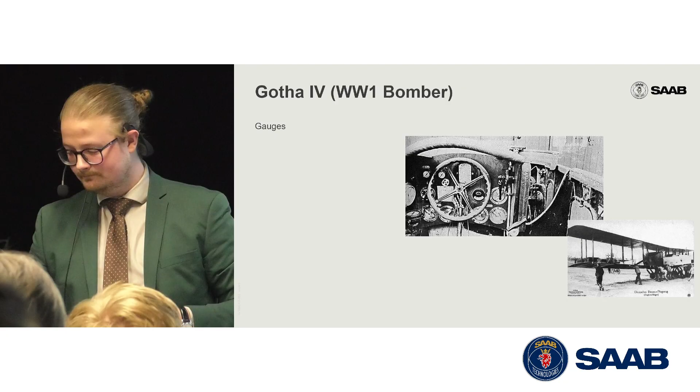What happened with the sound?

We also start to see a major improvement of the cockpit. The cockpit is now fully enclosed by a canopy. And there have also been some first early human factor designs, the Basic T. The Basic T was a British human factor invention, and the new arrangement allowed the pilot to easily scan all the vital information in a T pattern.

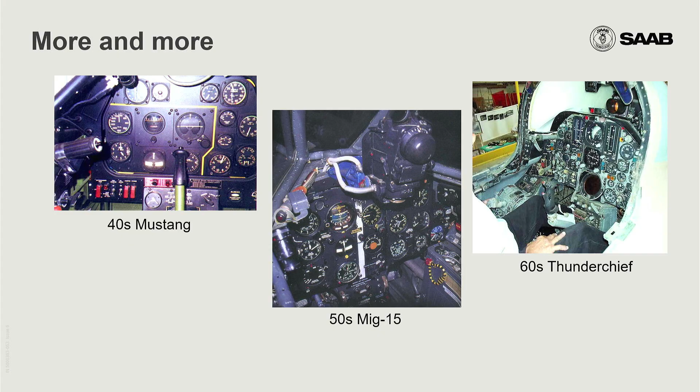Aircraft development after the war grew rapidly, and a lot of information was needed. And the more information needed, the more instruments were needed as well. As we can see here, the more capable the aircraft became, the more information had to be displayed and presented for the pilot. From the 40s Mustang to the 50s MiG-15, and I took an example of the 60s Thunderchief here with even some radar displays available.

More and more instrumentation. Three examples of very capable aircraft, but the human factor design, I'd say poor pilot: a lot of information, workload, overload. One instrument for each situation, one instrument for each capability.

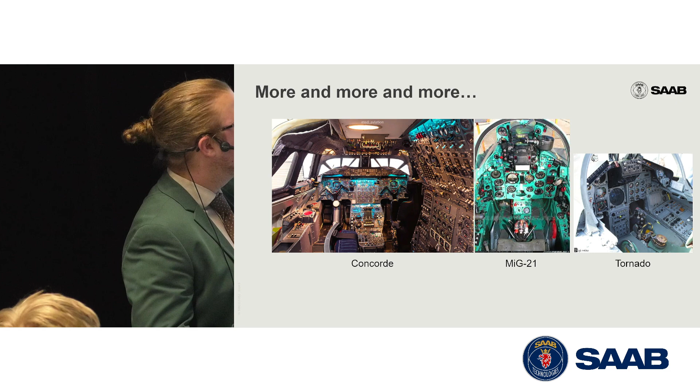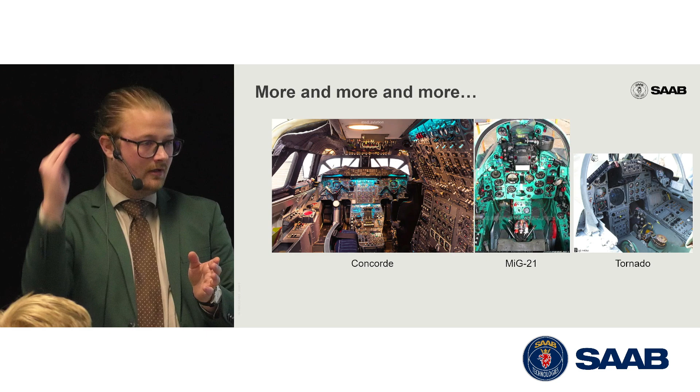Notice on the Concorde here, there are information and instruments on the ceiling. There is even an entire third panel here, operated by a third pilot. In the MiG-21, all the instruments are stacked on top of each other, so the pilot cannot even see outside of the front view. And the Tornado, some people say that the Tornado was when the Western world peaked with instrumentation inside of the cockpit. Because after the Tornado, around the 1970s, the displays arrived.

And what that means is what needed to be presented could be adjusted. It became possible for different tasks to be presented, and you could as well remove some other information. They could share space. With analog instruments, you always needed an instrument, a gauge, somewhere. But with the electronic displays, you could have them changed.

How about Saab then? Where did Saab start? How did Saab progress? And how did Saab go from a company building train wagons to license-built aircraft? How did we design the cockpit we have today? Let me guide you through it.

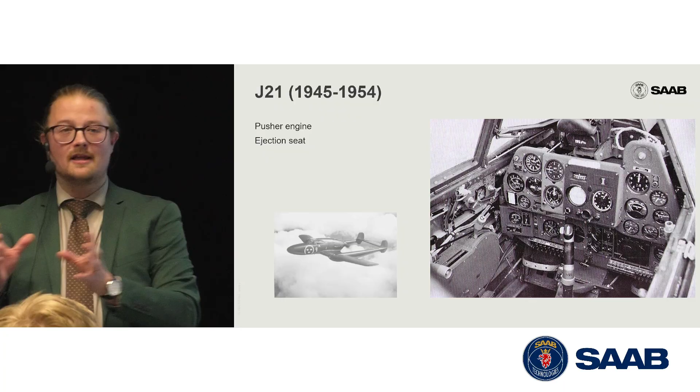When it comes to the human factor design, I'd say this airplane was perfect. No propeller to block the view outside of the cockpit. However, the maneuverability was not competitive. And one key factor when designing aircraft is you always need to balance trade-offs. Good field of vision outside from the cockpit, but worse aerodynamics. So this airplane was not competitive due to its not so good maneuverability.

J-29 Tunnan, in English called the Barrel. First Saab airplane to receive a nickname. Also Saab's first jet-driven airplane. What's funny with Tunnan is that there was some clever human factor design. The throttle adjusts how much output you give to the engine. And when the throttle was positioned just right to achieve takeoff, the pilot could easily with his finger press the landing gear switch, and then the landing wheels would go up.

That design is not used in the Gripen today. Today Gripen uses more the standardized landing gear lever, where you have a landing wheel on top of the knob of the lever to indicate that this is used to take out or pull in your landing gear.

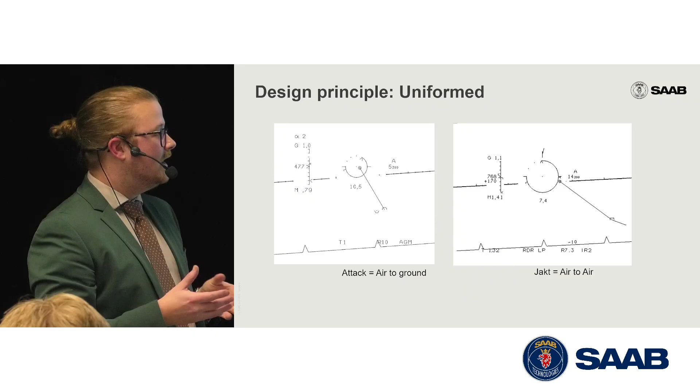The pilot does not need to think, oh, why am I doing air-to-air, why am I doing air-to-ground, what does this symbol mean? It's all uniform and easy to operate. Some mental models were introduced as well to help the pilot with its workload. In this case, how to handle and navigate the aircraft, to make it intuitive how the pilot moves related to the outer world.

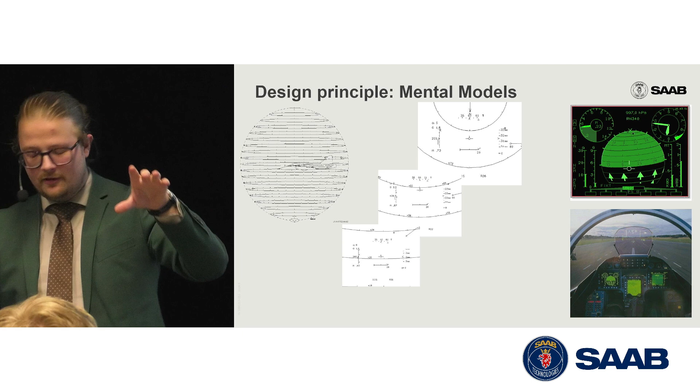In the picture here we see on the left how the presentation is displayed on the head-up display. Consider yourself surrounded by a sphere. When you fly straight, all these spherical lines, the attitude lines, are straight. In this scenario, we're currently climbing. To get to the horizon line and fly straight again, you want to make the attitude lines or the spherical lines go straight again, to help the pilot with some mental models.

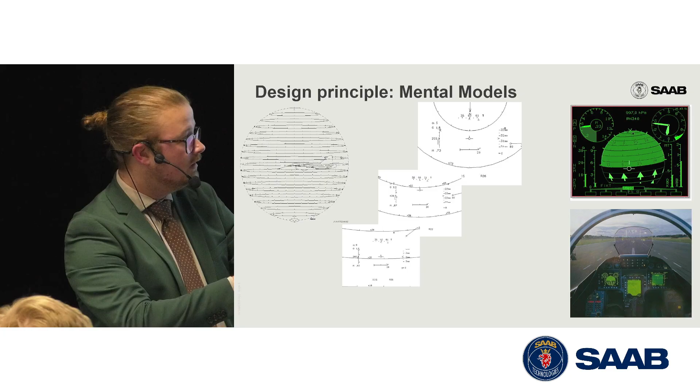On the right there, you have the presentation to assist the pilot with navigation on the head-down display. There the pilot observes the sphere from behind, but the principle is still the same.

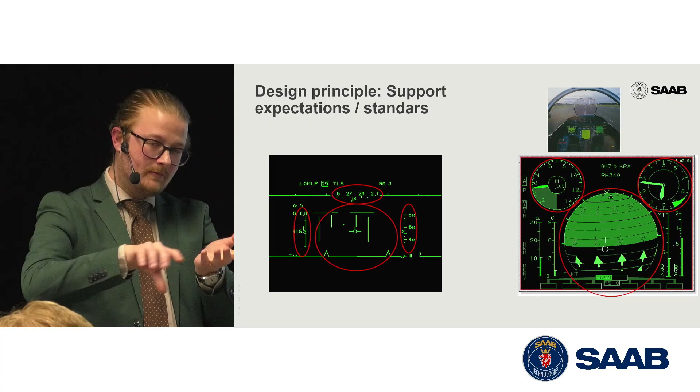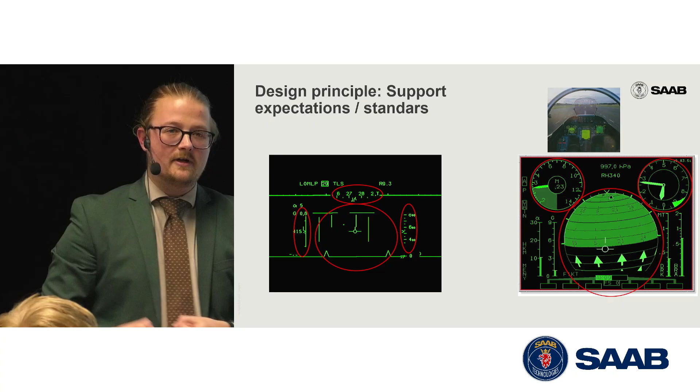Support expectation and standards. Remember the basic T, all the vital information placed in one easy-to-scan pattern. Implement that as well, because most of the pilots have flown aircraft before, and they do not want to relearn everything. We want to enhance it, use all their experience, and make it easier to fly this airplane as well. So in this case here, we have the head-up display.

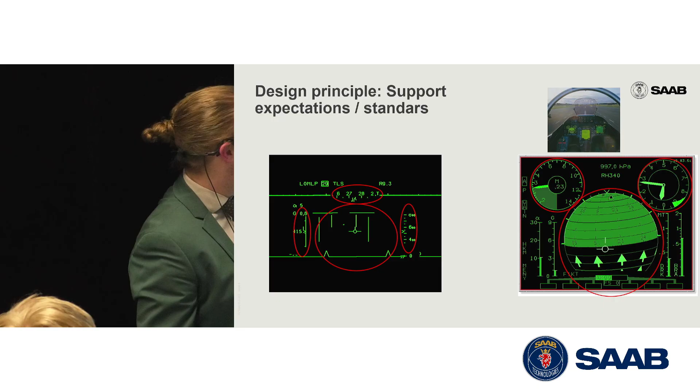On the top, there is the heading. On the left, we can see the airspeed. On the right, we see the altitude. And in the middle, you can see the attitude, how the airplane is related to the horizon. On the right, it's on the head-down display.

In the Gripen AB version, sometimes they called it the Mickey Mouse. On the upper left there, you see the airspeed. Upper right, you see the altitude. And in the middle, you see the heading as well as the attitude.

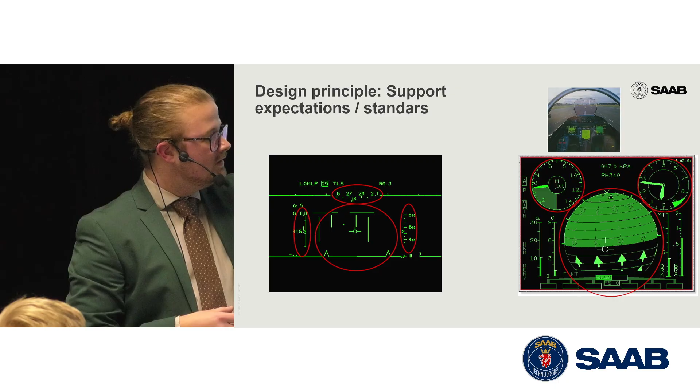Design principle, direct format. When the required action is clear in a dangerous situation, use direct commands. Commands related to flying and navigation use a male voice. Commands related to more tactical scenarios use a female voice, to even further distinguish if the command is related to flying or to the mission.

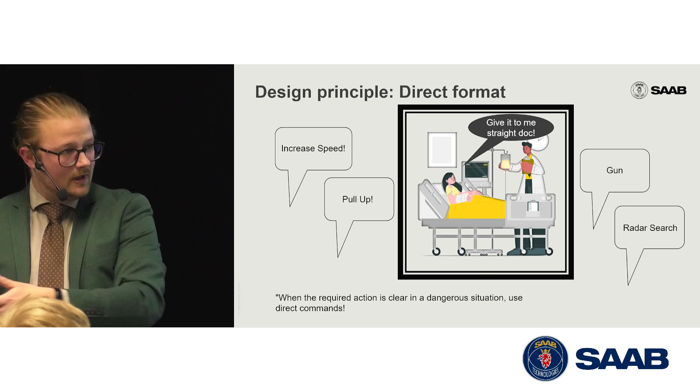The next update of Gripen was the Gripen CD version. All the previous design principles still apply, but with the CD version, interoperability became the primary focus. Swedish was removed as the primary language, and imperial units were introduced as well. Imperial units are the standard units when it comes to aircraft.

The displays were updated with color displays, with a possibility to adjust day colors or night colors, depending on what the pilot preferred, or if the pilot flew during the evening, they don't want too bright colors. The backup instrument was replaced with an emergency mode, integrated inside of the system.

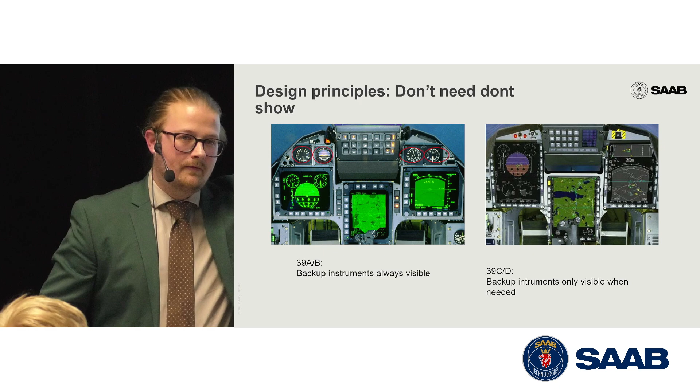The design principle: don't need, don't show. In the Gripen AB version, all the backup instruments were always visible. On the top there you see all the vital information needed to operate and fly the airplane. With the Gripen CD version, the backup instruments are only visible on demand. It's integrated inside of the system. If the pilot does not need the information the backup system gives him, remove it from the display to reduce the workload.

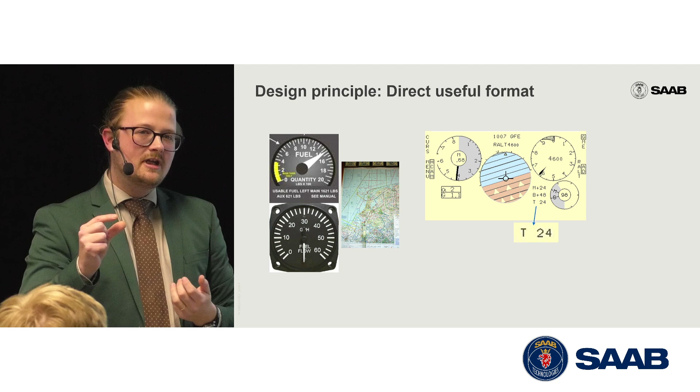We can also see here in the picture B plus 48. B is used as bingo fuel, and it's the minimum amount of fuel needed to immediately abort your mission and return to the closest landing base. And here you have B plus 48. In that scenario, 48 is 48% extra. And M plus 24 means you have 24% extra to fulfill your mission. But the most important part here is the 24 minutes. Just give it in an easy to understand number.

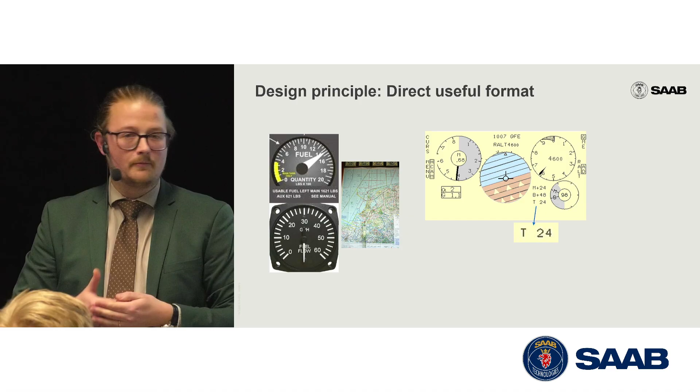With JAS Gripen E, Gripen goes from a multi-role fighter, where you have an aircraft which can do different types of mission, to an omni-role fighter, an aircraft which can do different types of mission simultaneously.

With a wide area display, the big display presented in the middle of the cockpit, not the middle of the screen, you can set up your presentation as you like. You can make it flexible. You can easily shift focus. You have different types of layouts and region handlings to enhance what's important, and perhaps to not show what's not so important at the moment.

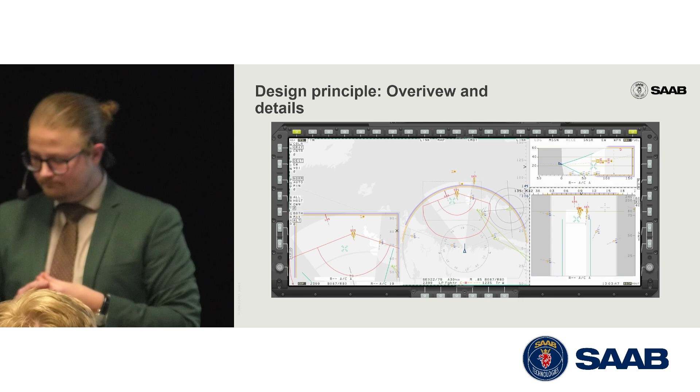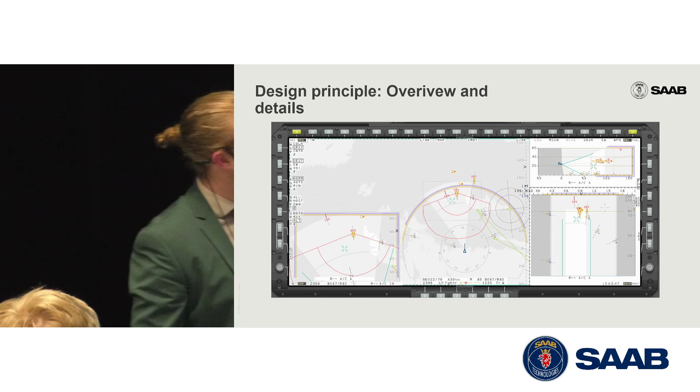So for example here, overview and details. With a wide area display, the pilot can get a good overview, but at the same time, with all the region handlings, get into the needed specific details. Here we have a tactical scenario, and the pilot wants to have some extra information regarding what's ahead of him.

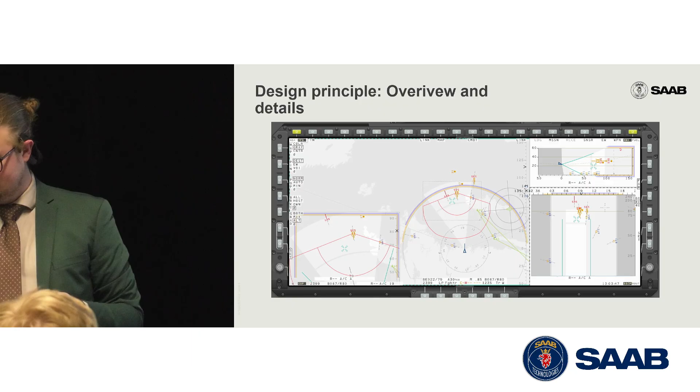Another design principle: show only what's necessary. In this case, I believe there are 3 different types of scenarios. To the right, I'd say it's a normal standard ferry flight. You're relocating from one base to another. You're moving in the civilian airspace. You don't need to have too much tactical information presented, only some vital maneuvering and navigation presentation.

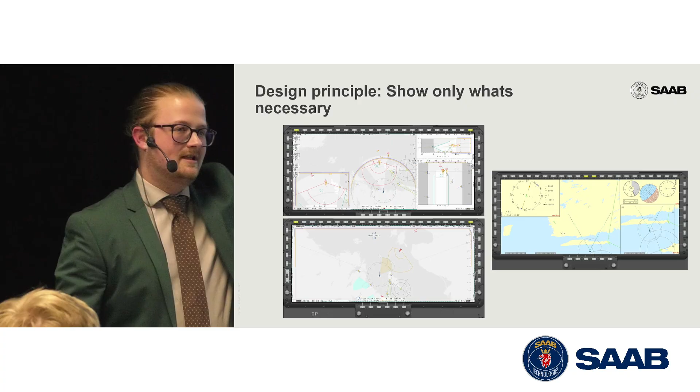In this scenario here, perhaps you're flying into an airspace where you do not know what's ahead of you. You want a good overview. You want to see everything. And given that perhaps the system tells you that there's something which is of more importance, present it and make that a priority. Still keep everything else visible, but add what's important.

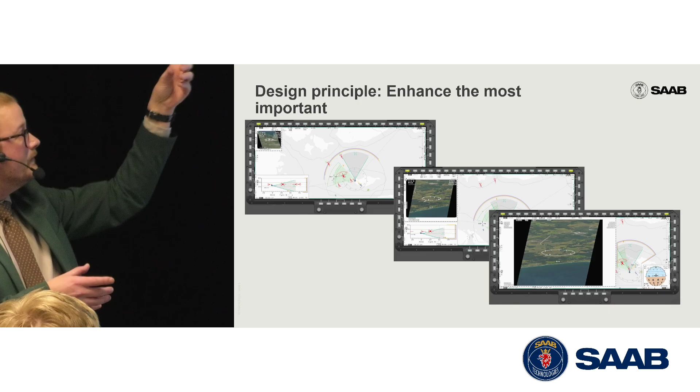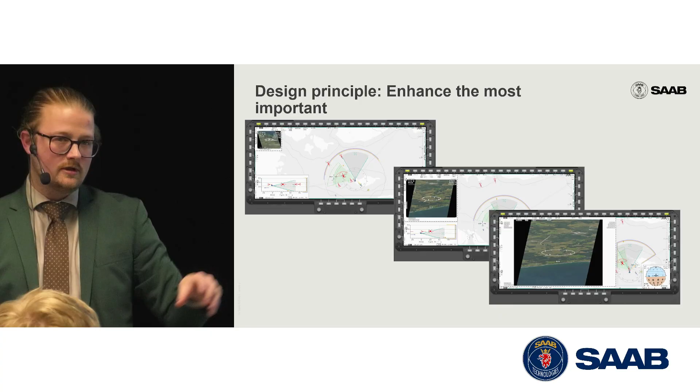And to enhance that even further, enhance the most important. In this example, enhance it to the desired size. Keep the vital information if necessary, or else remove it. But assist the pilot with what's important, and don't show the pilot what's currently not so important.

So, is this the end? Or, Gustav, will the cockpit in the future be empty? Will you have AI co-pilots? Will there be virtual displays with even more augmented reality? I'm not sure.

You need to talk in the mic. Nevertheless, thank you. Yes.

Yes, it's a little bit of a sneak peek to the next time Saab will get here. We will take part 2 of the HMI. Here you have the evolution from the historical perspective to where we are today. But also at Saab we are looking for...

All right, now it's better.

We are looking for what will be after Gripen and what will be in the upgrades of Gripen. And of course, everything I've said here is valid, but there are new aspects that are adding up. Up till now, I will say that typically, as a pilot, we're controlling our own aircraft, our own weapon systems, our own sensors, and then we can get help a little bit from our friends.